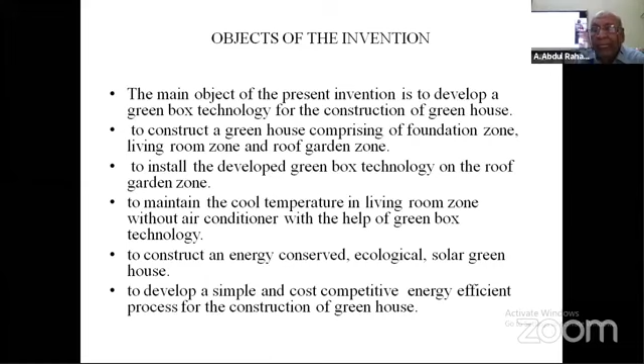Now, to maintain a cool temperature living room without an air conditioner, we have installed the green box. Energy conserved, ecological, solar greenhouse employing green box technology has been implemented and monitored on scientific principles. Once we construct the greenhouse, particularly in the second floor, with the room, windows, and air circulation, this helps keep the temperature always below 26 degrees centigrade.

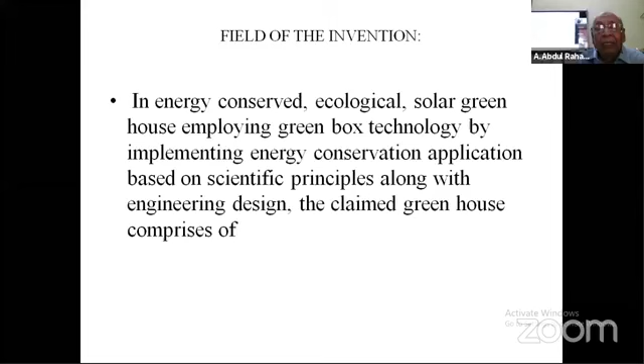The foundation zone is a predetermined material picking up the cool temperature, especially below the soil, and this soil temperature is very cool. At the same time, moisture is also picked up from the air taken from the second floor roof garden, in the green box, in which we have the fan.

The exhaust fan is able to collect all the air, and this air is filtered, because there is a lot of dust material and other construction materials that would enter the lungs, so we remove all the particulate material. These particulate materials floating in the air are completely filtered, and this filtered air travels from the second floor all the way down through the first floor, through the ground floor, right to the bottom of the earth below 10 feet, and that is circulated.

When it's circulated, what happens there? In the foundation zone, it picks up the soil humidity. It also picks up the temperature. The humidity is high, the temperature is low, the air becomes cool, and this humidified air is circulated and brought to the living room.

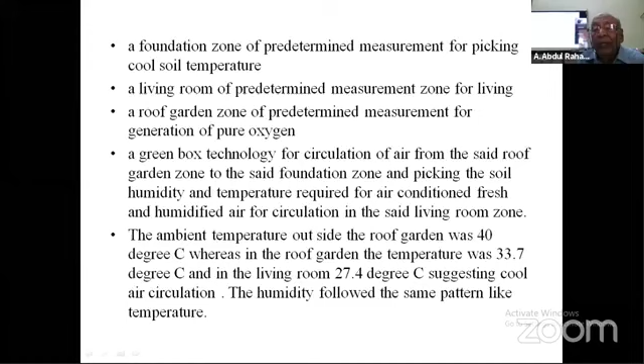You find that here the foundation zone is positioned vertically below the soil, whereas in the living room it is positioned vertically above the foundation zone.

I'm going to bring the information how the construction of the roof garden and all these have taken place in my house. This has been done in my house using my pension money, to show people that we don't require any EB connection. We can take up the solar light, and we can pump the water also using solar water energy. We don't require any amount of energy, thereby the energy is saved.

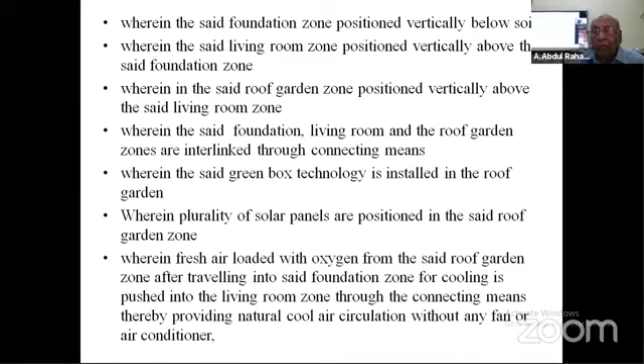Whereas in the foundation, living room, and roof garden zone, all these things are interconnected through connecting means by pipeline. The green box technology is installed in the roof garden, with a plurality of solar panels positioned in the roof garden, wherein fresh air is loaded with oxygen from the said roof garden, and after traveling the foundation zone below the ground and cooling, is pushed to the living room, providing natural cool air circulation without any fan or air conditioning.

Wherein stale air, particularly the carbon dioxide from the living room, is flushed out to the roof garden zone, because nearby, outside the house, outside the garden, we have developed plants, and these plants take the stale air which is full of carbon dioxide.

This air is consumed by the plants, and these plants release so much of O2, and that O2 is taken to the roof green box. The green box is provided with an exhaust fan.

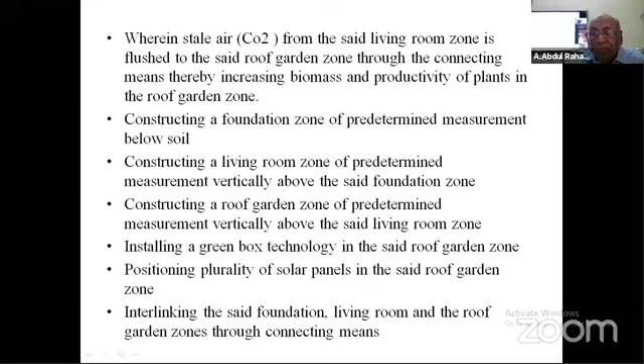The construction of the foundation zone is a predetermined measurement below the soil. Constructing the living room is also a predetermined measurement. Constructing the roof garden is also a predetermined measurement, vertically above the said living room. Installing the green box technology in the roof garden zone and positioning the solar panels is done in the roof garden, interlinking the foundation, living room, and roof garden zones through connecting means.

All these connections are made using PVC connections. The garden is also provided with water. We have a tank, and this water is taken from the borewell to the tank, and from that tank, water is given to the roof garden.

In the roof garden, the water is also used for cleaning the solar panel, because during summer when temperature increases, solar efficiency and energy output decrease. So when the light and energy factor decreases, we spray water over the solar panel. This greenhouse claims the solar panel efficiency is increased by avoiding dust particles through the sprinkling method.

For the sprinkling method on the solar panel, we have already taken a research grant from the Tamil Nadu State Council for Science and Technology, and used this technology for developing the cleaning and spraying method on the roof solar panel. Since the solar panel is kept so clean and filtered, we also received an award from the Tamil Nadu State Council for Science and Technology for developing this energy efficiency technology.

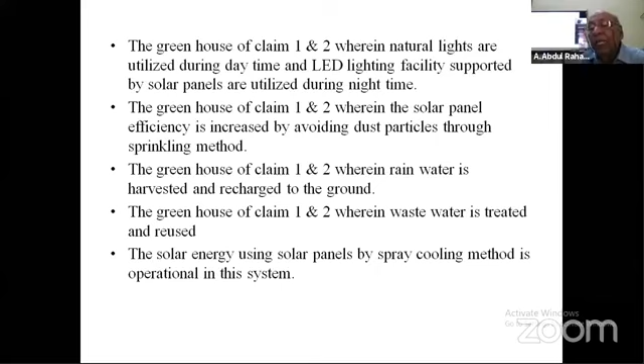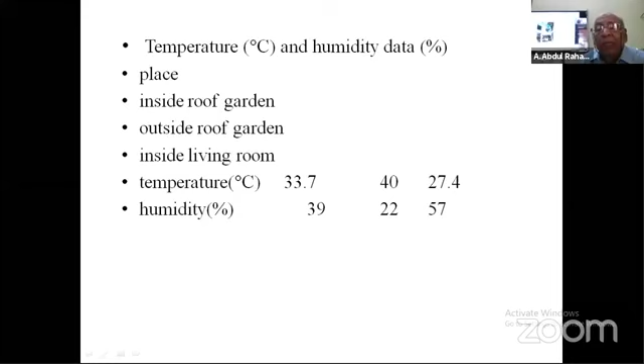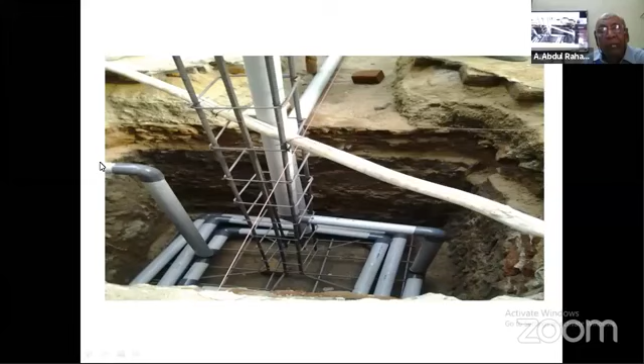When it enters from the second floor, it keeps increasing inside - this is the inlet from the second floor, and this is the outlet that goes to the first floor, to the living room. All these are interconnected - the water and air - and below that, the first floor is constructed.

You find that air is inside. I have to close this because dust or insects will enter. This is my first floor, my living room, below the ground level. After construction of the first floor, I provide air which goes inside, and thereby the temperature is cool without fan or AC, and oxygen is present there.

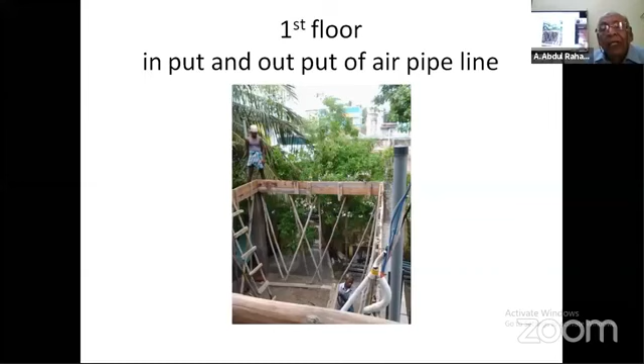Here, further up, is the second floor above the first floor. This is exactly the green box, and inside this green box I have an exhaust. This exhaust is also connected, and I have a connection.

Again, this is a solar energy connection. We have solar energy connection, and this is a connection, and the power is given to the solar. The exhaust will work here, and here it is completely covered.

You find here, just nearby, the solar panel is there, and this is the cover inside the room, and inside this you have this construction.

Inside the construction we have kept steps like civil construction, wherein we kept all the plants inside here, and also watering is done through the pipeline.

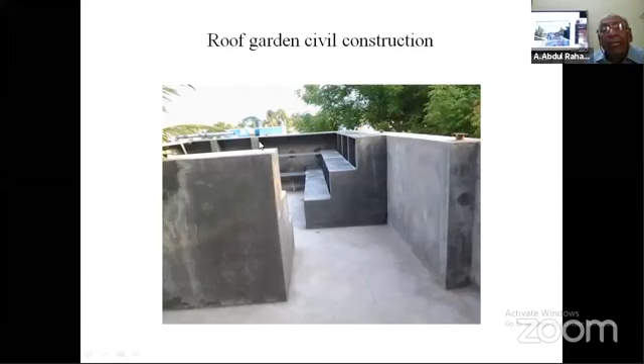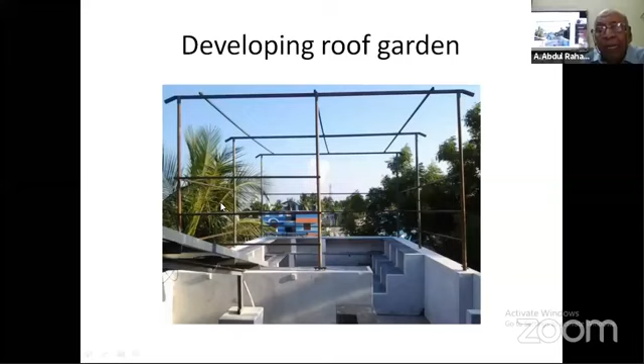Different types of roof gardens are present there, and nearby you find neem tree, coconut tree, and other trees. Nearby there is also a railway line, and particulate materials float in the air. These particulate materials will be filtered, and along with the filtration, this air goes down to the ground bottom, and that air will be circulated in the first floor living room.

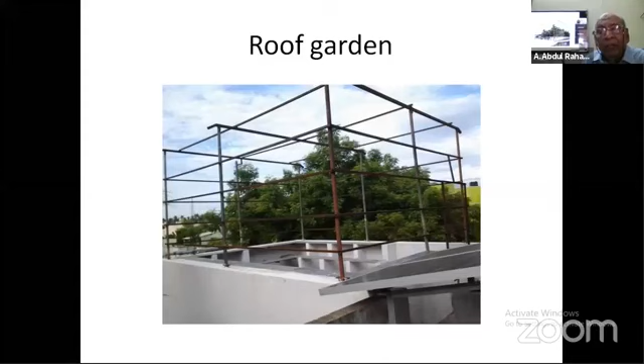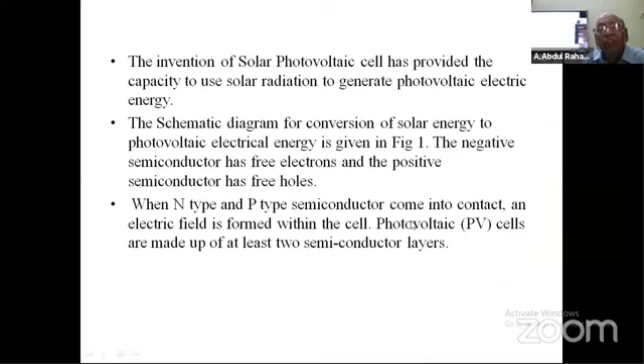Here you find the construction, where water from the tank is also coming, and spraying of the whole thing is also provided. You find the solar energy details that were given, and this solar energy, they find, helps with spraying.

For this purpose also, we found that the temperature during the summer season is very high. When the temperature is very high, the energy efficiency is low. Thereby, we found that spraying the water keeps the solar panel always clean, and the solar energy is taken properly.

When clean water is sprayed here and there, dust does not settle, and the solar energy requirement, which is very high, is met.

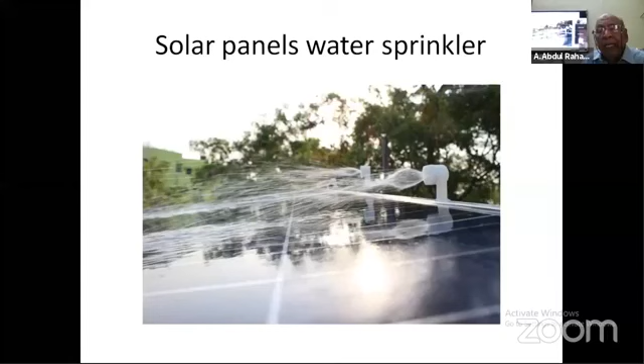When this energy is taken, you find this 4-inch pipeline below, where air is taken within this, filtration is done, and this filtered air goes to different types of air systems.

You find here the whole sprinkling system is there. This sprinkler is given to the plants here, so much so that when the air is taken, the temperature is also cool.

That cooled temperature helps to take it through the exhaust fan, and through the exhaust fan it goes down. Not only that, when the air goes down to the bottom, the soil temperature is also low, thereby the overall temperature is low.

Therefore, when the air comes, this is oxygenated material. More oxygen means your thinking system has no diversion, and your brain activity is more active and agile. Because of this, the temperature is low and the oxygen is very high, and that oxygen is naturally available.

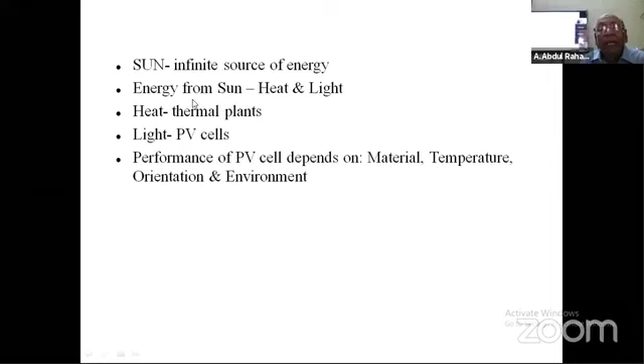This is the TNC, Tamil Nadu Council for Science and Technology project. This project is application of solar technology for domestic use by improving photovoltaic cell efficiency through spray cooling method. For this also we got the award. Solar energy, infinite energy from the sun, for light and heat, and PV cells.

Performance is also recorded. Temperature is very important, especially in tropical conditions. Cooling of a solar panel is very important. Water is very economical and efficient for cooling, and spray cooling is very effective for distribution of coolant. We thought we could take up some coolant phase, but the coolant available didn't work and was also costly.

So we thought we could make the air itself circulate from the atmosphere, to provide a cost-effective method of cooling the solar panels, increase the efficiency of the solar panel, integrate the technology, and also make it suitable for domestic purpose.

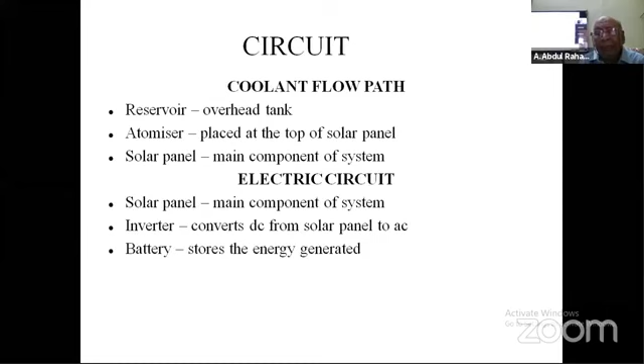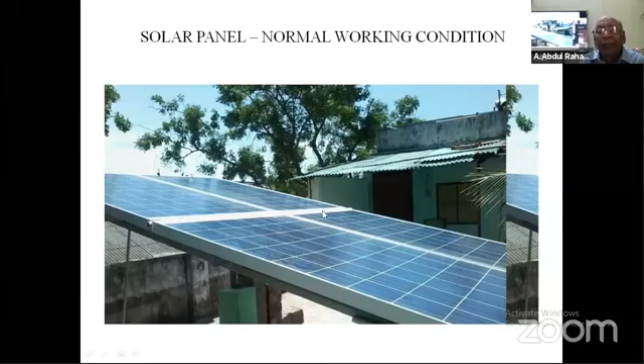That is also there, solar battery has come now, so many informations are available. Here you find this is where you have the tank and water available. And on the second floor, here you find the solar panel and the sprinkling.

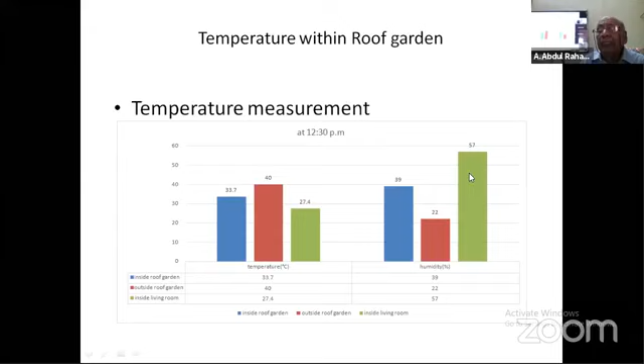At the same time, the air outside is taken through the pipeline and goes inside the green box, and within the green roof garden that air is also taken, and the humidity is very low, and sprinkling is also there in the plants, and thereby the humidity is maintained very low. Inside you find that without cooling, the efficiency falls.

Without cooling, efficiency falls with increasing temperature. With cooling, the temperature is reduced and the efficiency is increased. This is the more important outcome, because going for AC is very costly, going for a fan is again costly, and also consumes electricity, and this electricity need not be consumed provided we take the solar panel.

This solar panel, without battery, we can make use of it and thereby generate our own power. And not only that, in the case of the house, when we go for greening cities, this is not only for electricity, not only for cooling with AC, or providing AC or fan without the extra consumption, but at the same time we have to have the treated water.

The water generated in the form of wastewater is treated by an anaerobic baffle system. This baffle system is a simple system in which bacteria is coated, and this bacteria is able to take away all the organic material. When they take the organic material, which carries a high BOD, biological oxygen demand, the BOD is reduced. At the same time, with an anaerobic baffled reactor there is also a problem of generating smell, and that smell generation is simply taken care of by the activated carbon system provided within the anaerobic baffled reactor system.